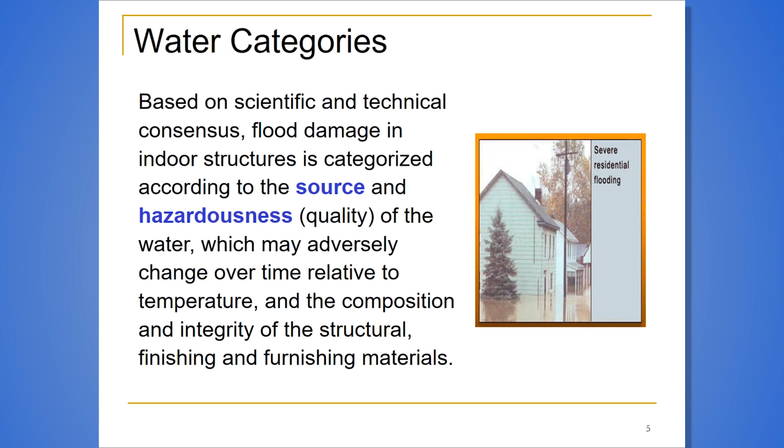It includes. We're now going to address water categories. The categories that I'm going to describe have been accepted by industry, government, non-governmental organizations as the best way to classify or categorize the degree of flood cleanup and remediation that needs to be done to render home environments back to their pre-flood condition. The categories are based on scientific and technical information that's been gathered and focuses on the source of the water and the quality of the water. The quality designates the hazardousness, which may change over time and needs to be addressed in terms of the way the cleanup is conducted and also those who are doing it, the way they need to be protected.

So these water categories are referred to as Category 1, 2, and 3. Category 1, clean water. This is within a home from a clean source, no immediate health concern. For example, a child plugs the drain in a tub, runs the water from the faucet, and then forgets about it, runs outside to play.

The tub overflows, and we have a limited area flood condition in the home. Since it's clean water, it's not intrinsically contaminated. As long as it's addressed quickly, there's little concern.

Obviously, the water needs to be extracted, and examination needs to be done to determine the penetration of the clean water. The water needs to be removed by moving air, dehumidification, and then inspected for several days later to ensure the absence of odors, which would indicate microbial growth.

Category 2 would be gray water. This is more of a concern because this water does have some contamination. Classic examples would be from a dishwasher or a washing machine.

If they leak, they flood an area in the home, and it's similar to Category 1, although now we recognize that water contains microorganisms. Because of that, there is expedience required, perhaps more so than Category 1, to quickly remove the water and dry the affected materials in order to prevent a situation where, if left sitting, it could actually become Category 3.

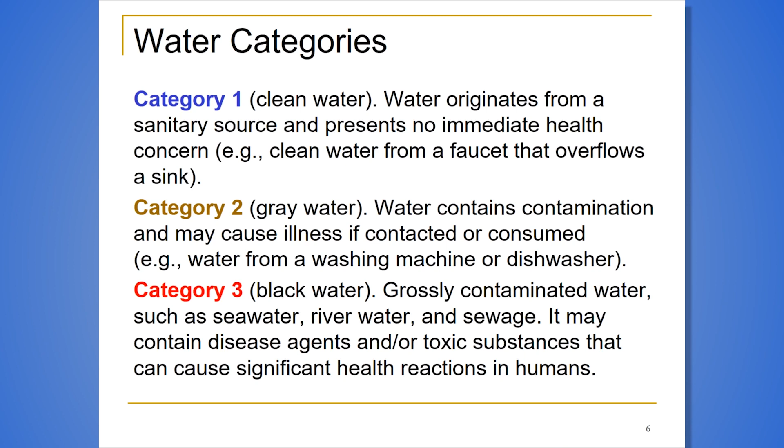Category 3 water contains a variety of potential human disease agents and also toxic substances, residues, and a variety of chemicals that go down a drain that we're all familiar with. Upon human exposure, these chemicals, these microorganisms, and their products or components may have an adverse effect upon human health. The next slide shows more specifically what we're talking about in terms of, first, microbial contamination.

Certainly bacteria - these can be environmental, or they can be of human origin. Viruses would typically be from human secretions, exudates, and waste materials. Fungi, which would be molds and yeasts, and parasites, which would typically occur in a variety of sewage situations.

And these contaminants present both an infectious, an allergic, and sometimes a toxic risk. I'll address that more in a moment.

Chemical contaminants - residues of pesticides, fuels, solvents. Think of floodwaters running over woodland or agricultural farmland, or even a paved parking lot, picking up residues of oil and other solvents, greases, and so forth that have leaked or dripped from cars and trucks. All of this gets taken up by floodwaters and can enter a home or building environment from the soil and soil associated with industrial areas.

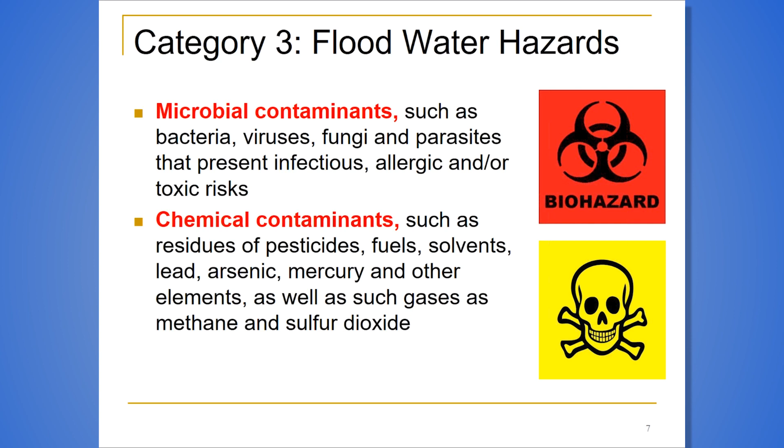It's not untypical to find residues of lead, arsenic, mercury, and then gases such as methane and sulfur dioxide. Those typically will be a result of standing water inside a home environment where they're confined and present an additional hazard to those doing the cleanup.

I'll address the topic briefly of water categories changing over time. So after 24 hours, water categories can change. Category 2 water, if left unremediated, can become Category 3 due to time and increased temperature, where we have essentially incubation conditions for a slew of bacteria and fungi, particularly molds, that can continue to grow and multiply until the water becomes grossly contaminated, which defines Category 3.

Such situations, for example, can actually result from a Category 1 water loss. I remember a situation in a mountainous environment in the U.S. where someone had a mountain cabin that they used periodically during the year, but not very frequently. They would leave the heat on, particularly in the wintertime, to prevent pipes from freezing. Well, they allowed individuals to use that cabin, but those individuals, when they left, turned off the heat. Pipes froze, burst, and it wasn't until two weeks later that someone discovered the water still running, several feet deep.

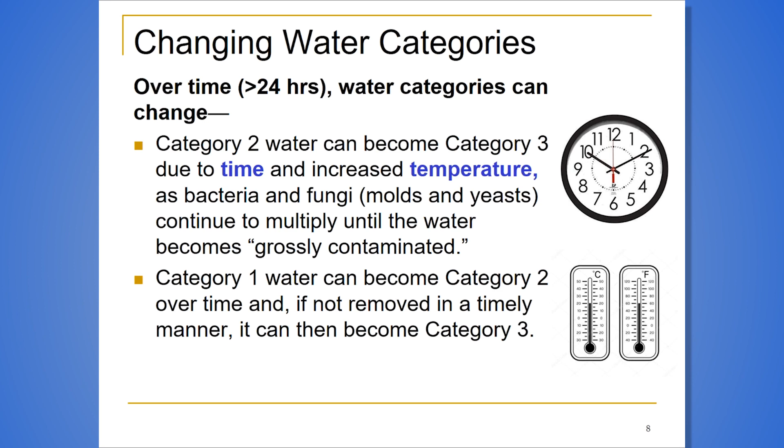We'll focus on one of the most serious consequences of flood-damaged homes and the time factor relative to Category 3 water, and that's mold contamination.

Most of us, I think, are aware that molds typically reproduce by a mechanism utilizing structures that they form called spores. Spores are essentially seed-like structures, just like we plant vegetable or flower seeds in a garden - add water, they germinate and grow. The same situation is in effect for mold spores. These are seeds that can be widely disseminated. They can be produced in heavily contaminated areas by the millions. Wherever they land, if there's enough available moisture, then they can begin to grow.

And then grow quickly if conditions are optimum for their reproduction. We call this amplification. And then, due to air currents, activity in the area, individuals coming in to clean up the flood damage, extract the water, remove the damaged materials, there can be extensive dissemination of these spores.

Mold growth always follows the path of water migration, and many can reproduce on materials, which we'll discuss, porous and semi-porous materials as we call them in particular, that provide a substrate or food source for their continued growth, amplification, and dissemination.

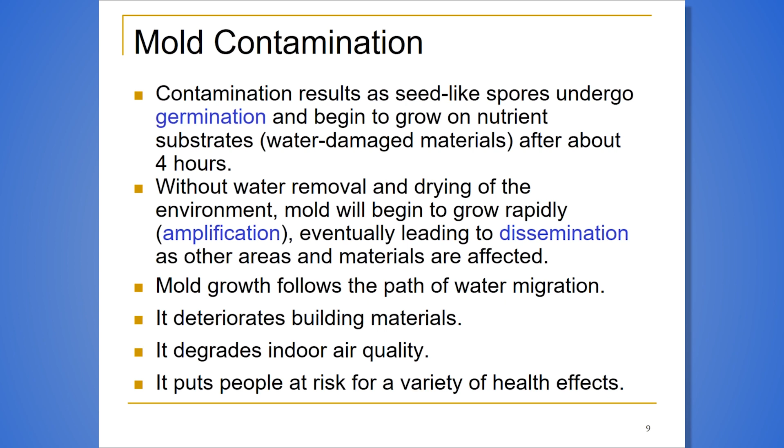Many molds love wallpaper, and in particular, wallpaper glue. Molds, when they attach to a surface and begin to utilize the substrate as a food source, they excrete enzymes that will actually dissolve the material so that the material nutrient sources can be utilized by those molds. And so in that enzymatic process, those materials, those substrates are degraded.

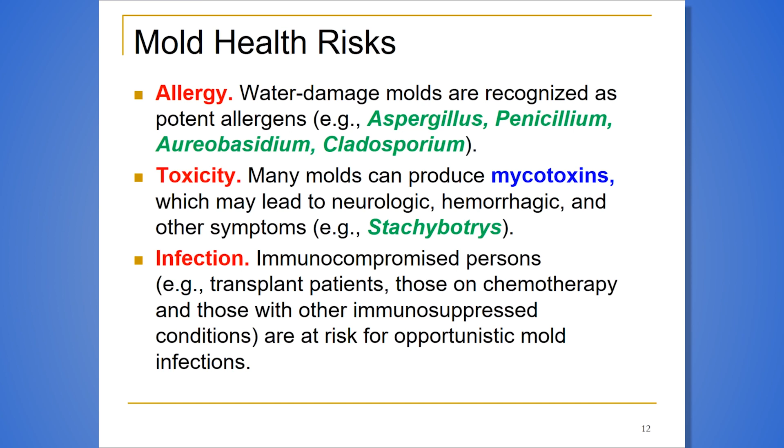We have consensus these days across the board from many organizations and agencies. I'll just share some here with you. U.S. EPA has stated all molds have the potential to cause health effects.

The Institute of Medicine, National Academy of Sciences, in a landmark publication in 2004 entitled Damp Indoor Spaces and Health, stated excessive indoor dampness is a public health problem. The main reason is that dampness can precipitate the growth of both bacteria and mold, which can present risks in regard to allergy, toxicity, and potential infection.

And then ACGIH, the Professional Industrial Hygiene Association that works in occupational environments, states active fungal growth in indoor environments is inappropriate. It leads to exposures and adverse health effects.

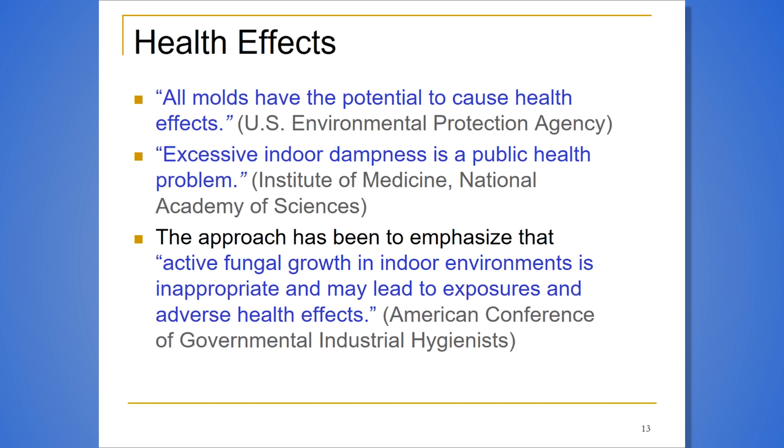The first step, assuming water has drained or been extracted, is to remove the salvable or unsalvable materials - what can be retained and cleaned and put back in the home after everything is completed, or not.

Then we have some structural activity to consider in terms of removing water damaged, mold-contaminated porous materials. We then undergo a cleaning process or muck out. At the same time, begin drying the environment. We'll discuss biocides, which can be used.

But if biocides are to be used, there is much to be known about their use, and we categorize their use as to be done with caution. Drying is essential, and then prior to reoccupying the home environment...

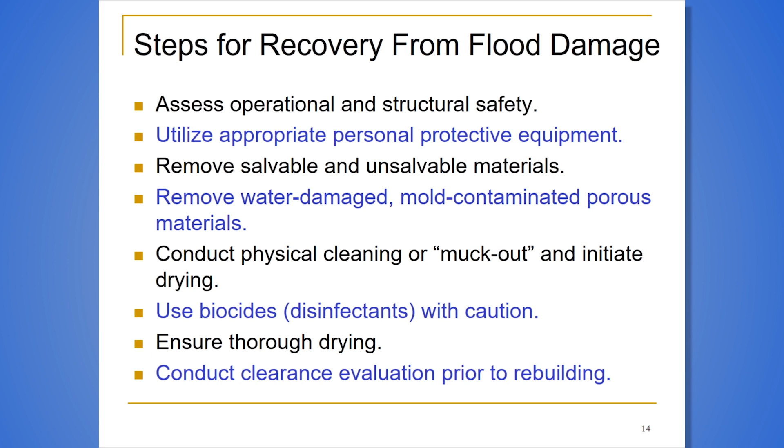So let's go ahead and begin to address these 8 steps, which would be operational and structural safety. As I've stated here, although floodwaters may have receded from the area, standing water may still be in the house.

Unfortunately, we know of a number of situations where individuals wanting to go in and assess damage, even with a few inches of water still remaining in the home, have stepped in, and unfortunately the power had not been turned off, and extensive shock or electrocution may occur. So something simple is ensuring that the power indeed is off, that wires are not in contact with the water. A simple but extremely important safety measure.

And then again, if there has been water still sitting there, even a small amount, animals may have taken shelter. There may be snakes, or in certain areas of the country, there could be an alligator in there - animals that have become trapped and obviously present hazards to those individuals that walk in.

And then certainly the structural integrity of the home itself. How does it look from the exterior? Is there a roof that's drooping? Is there a foundation that's cracked and crumbling? Are there concerns that this structure that is left may collapse? This is an assessment that should be made prior to entering the water-damaged environment.

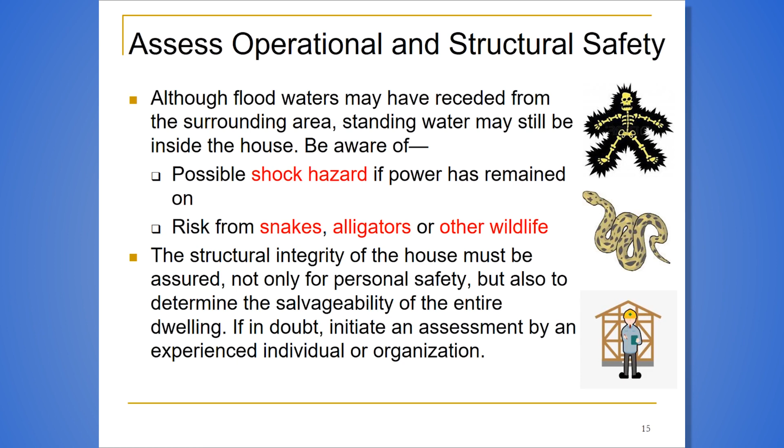Continuing with personal protective equipment, we want individuals to be properly protected. And yes, it's going to be a very warm and very humid environment typically, but we do recommend for this initial walkthrough and then start of the cleanup, individuals wear long pants, long sleeve shirts, proper footwear, preferably boots or work shoes of some type - certainly not bare feet or flip-flops, too many physical hazards - and then exposure to the Category 3 or black water and its contaminants.

Respiratory protection nowadays is available at home improvement stores, even supermarkets. An N95 disposable mask is inexpensive and certainly worth the price. I do recommend those that have an exhaust valve built in to avoid the buildup of humidity in the mask and maintain its useful function over time, so it doesn't become saturated and lose its effectiveness.

The last bullet here on this slide: keep individuals with conditions that make it difficult to breathe away from cleanup activities. So individuals with respiratory allergies, those that have asthma - well, those with asthma certainly couldn't wear a standard respirator and might even have problems with a disposable respirator. Any respirator provides additional stress to the breathing process, makes it harder to breathe. We would urge individuals with those health conditions to refrain from participating in those activities.

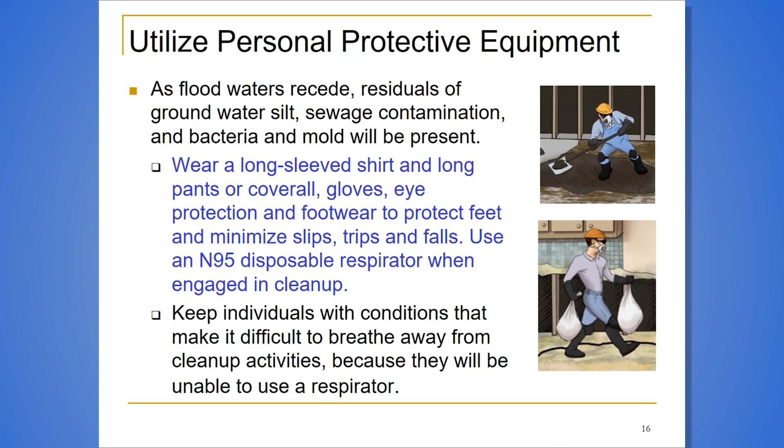So now that we're effectively garbed, our focus is identifying and removing salvable and unsalvable materials. Some furniture, clothing, appliances, and others will be damaged beyond repair.

If there's been a washing machine and the motor has sat in water for two weeks, it's unlikely, due to the insulation materials, the wiring, glues, sealants, and so forth, that it can be restored to its pre-flood condition and remain working.

Furniture comprised of a number of different substrates we've spoken about can be actively growing mold and bacteria, and will not be capable of being restored to pre-flood conditions, and may be very much at risk in terms of human health.

Things that are non-porous and made of metal or glass, and clothing, for example, may typically be able to be laundered and salvaged. It may take several washings. That's a determination that will need to be made.

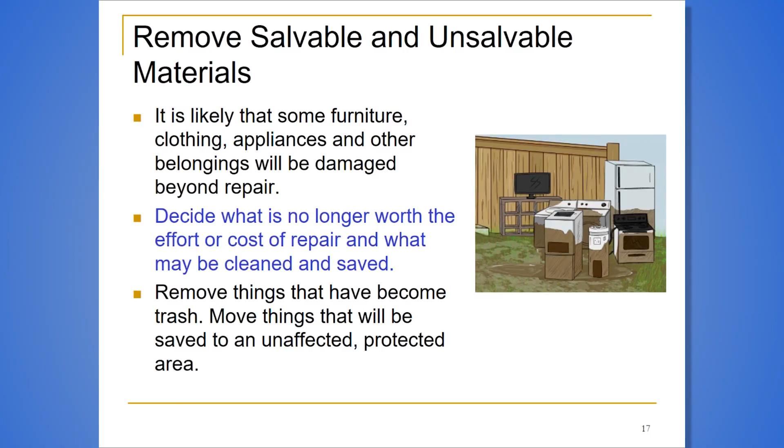As things are brought out of the house, they need to be separated, and those that are salvageable moved to a safe area for subsequent cleaning and reconditioning. So we'll go to a slide that shows someone going through the removal of materials prior to indoor cleaning of the flood-damaged home.

As we go to the next slide, we'll be a little more specific in terms of what might be salvable and non-salvable. Electronic equipment, if it had no contact with water, potentially, even though it's been in a high humidity environment, might be salvable. It might take a specialist who does that type of restorative work. So if there is electronic equipment or appliances that are very high value, if they were not submerged and appear salvable, the recommendation would be to take them to a professional that specializes in restoring electronic equipment and appliances.

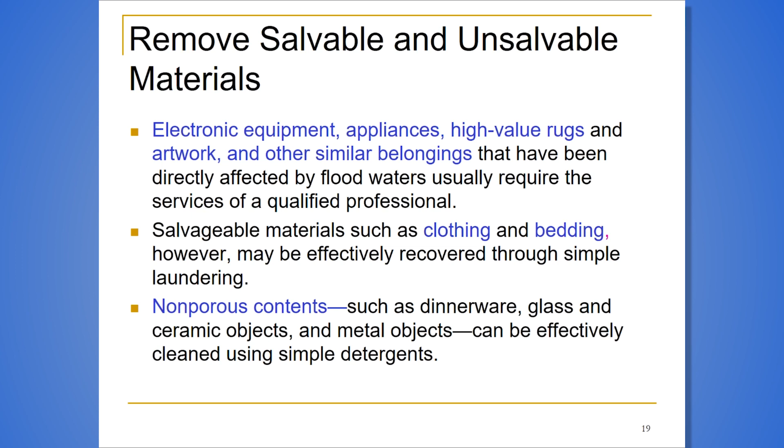It's not unusual for individuals coming back one, two, three weeks later to be greeted with this type of scene in their home environment. This is how rapidly water can wick up materials. It's a high humid environment. All surfaces and materials are now growing mold and associated bacteria, especially those structural materials that are semi-porous, such as fiberboard, OSB, oriented strand board, plywood, even hardwood materials have to be removed. They're not salvageable.

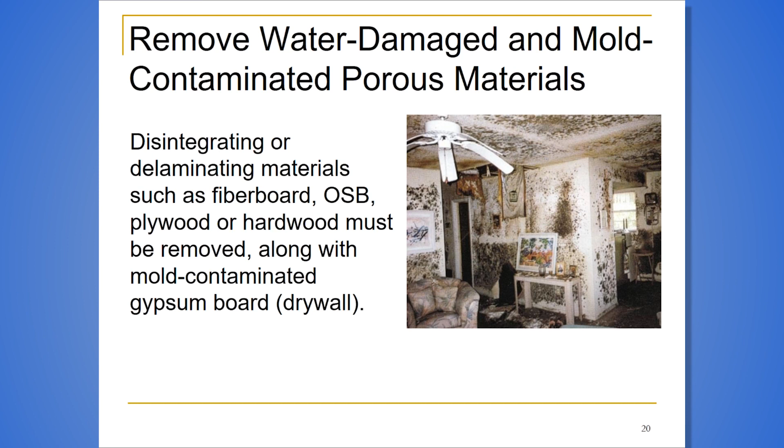And of course, this gives us great cause for concern. In this situation, the homeowner is going to do this themselves. They absolutely have to be properly protected, as we've discussed previously.

We're going to discuss physical cleaning and how important this is. So at this point, we have individuals who are properly garbed and protected, going in after water has been extracted or has drained away, previously to returning, and now physically removing the dirt, the soil, the silt from the river water and the like. Sometimes it requires a wheelbarrow and shovels, other times raking it or sweeping it up.

At this point in time, we want to clean these materials out in bulk as much as possible in order that we can begin the drying process and begin to investigate the penetration of the water into subflooring, behind cabinets, into interior wall spaces, and the like.

Now we are going to get very soon to the importance of drying. Once the waters have receded, excess moisture has been extracted, the cleaning or muck out has been done, the power is back on in the home, it's very easy for a homeowner to say, well, let's flip on the air conditioning system and help dry out this environment. And of course, air conditioning systems work on a dehumidification process and can be extremely helpful.

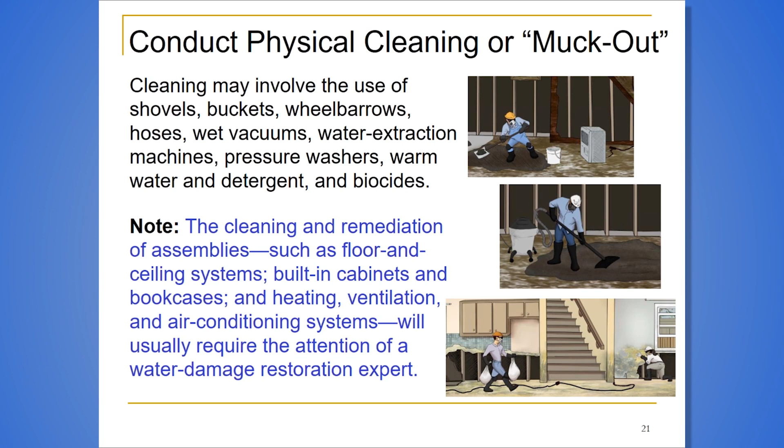We see some individuals doing the muck out - top left individual, again, very common. It's a hot, humid weather condition. Fortunately, this individual appears to be wearing proper footwear, but has skin exposed, no respiratory protection. In the bottom photo, at least they appear to be wearing Tyvek suits, safety shoes, and are now using water and detergent to do the cleaning, or as you see here, getting the muck out.

We'll focus now on cleaning, and this is the removal of any standing water, debris, trash. We've gotten the salvageable items out, and we're looking at using detergents - yes, detergents in water. Our first reaction might be, wait a minute, we're going to put more water back in? Well, water is going to be the best means of using a detergent to help clean, just as we normally clean a variety of surfaces and materials in our home. There's not water damage, yet we have to remove that water when we're done and initiate drying. So yes, most cleaning will involve an aqueous solution of water and detergents.

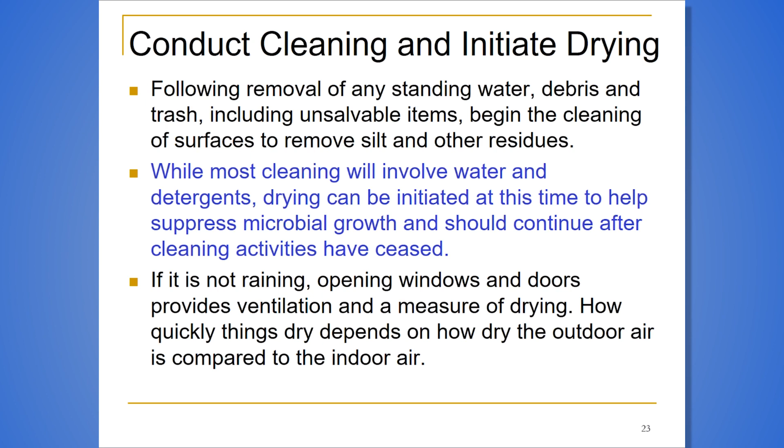If it's not raining and someone's living in a dry environment, they can open windows and doors, get ventilation, and begin drying things out. Drying depends upon how dry the outdoor air is compared to the indoor air. It's not unusual for flood damage situations to occur in very humid environments, and so we don't want to open doors and windows. We want to dry out that indoor environment, so we close doors and windows. We've removed salvable materials, we're initiating drying, we've cleaned everything out, and we want to dehumidify the air.

Drying is typically facilitated by moving air across a wet or damp surface. We do this when we use a hairdryer, for example. How does a hairdryer work? It blows warm, dry air through our hair, strips off the water molecules, and sends those into the air. Typically, an indoor home environment is at a low humidity, might be in the 40s or even high 30s, and the moisture will stay there in the air. However, in a high humidity environment, whatever water molecules move off a damp surface, if it's very high moisture content in the air, which we call relative humidity, then those water molecules will tend to recondense on surfaces. So it's self-defeating unless we can get that water out of the air, and so dehumidification is extremely essential.

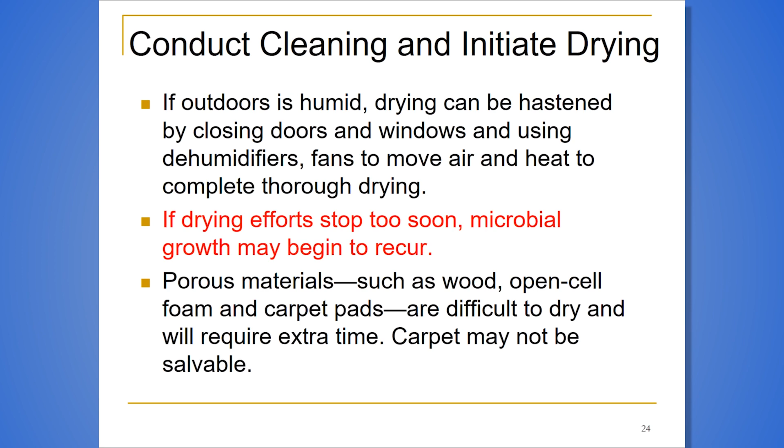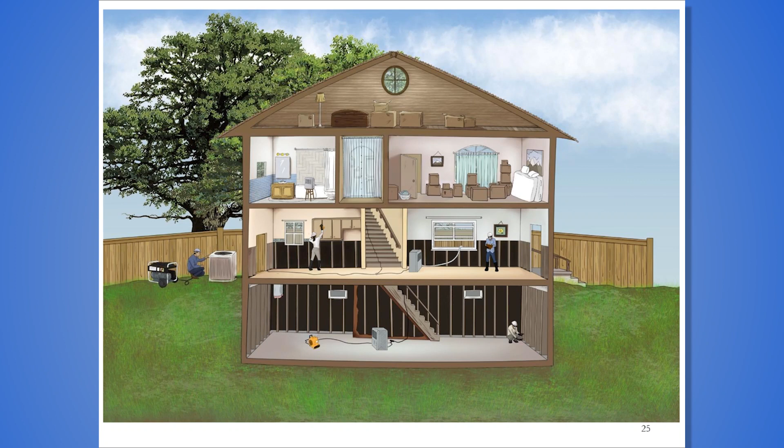This is a Category 3 flood damage situation. We have a pictorial which will appear in the report made available to the public, which is webinar based, to show activity. The salvable and unsalvable materials have been removed below ground in the basement area. The drying and dehumidification is ongoing while an individual is assessing the wood framing and whether it needs to be replaced or not. The drywall and insulation material have all been removed. On the ground level, we have ongoing cleaning, as well as drying and dehumidification. On the upper level, in the right room, materials were placed there that, as the flood began to occur, were not water damaged and were preserved from exposure. On the left, we see a bathroom environment that, usually high humidity anyway, is being dried down, and microbial contamination is being remediated. We see a containment curtain there between the two rooms.

When large open surfaces are dry to the touch, water can still remain in cavities, cracks, and non-contaminated porous materials that are still intact. They may be dryable. Some cavities can be opened and aired out. Others can be accessed only by removing built-in cabinets, making holes in kick spaces, soffits, or wall or ceiling cavities, which may require the use of a professional. Again, an emphasis at this point in time on moving air, increasing dehumidification, and those cavities and structural spaces will take some time to dry - usually several days, usually at least 72 hours or more.

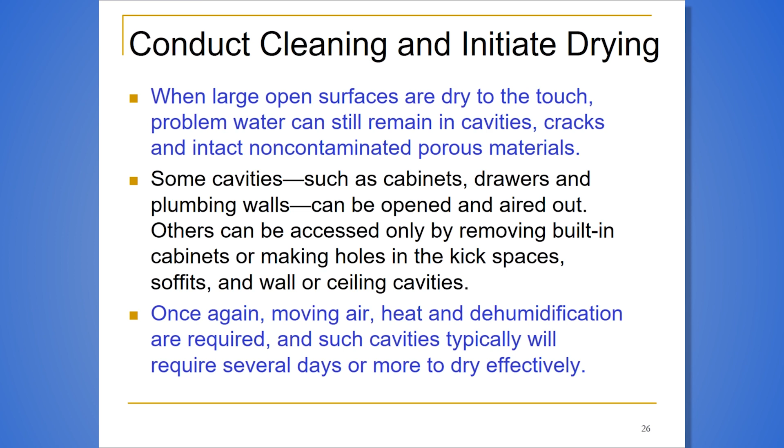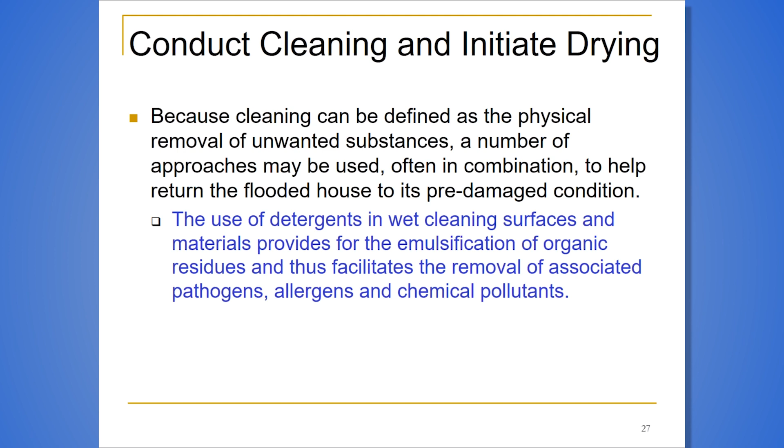We begin to address the topic of biocides. Biocides are chemical formulations - by nature, bio means living, and cides means kill. So we're looking to kill life forms, typically bacteria, fungi, viruses, parasites. These will have a statement on their label that they are a disinfectant, a sanitizer, or antimicrobial. By law, if that appears, then they are required to be approved by the U.S. EPA as part of their antimicrobial pesticide regulatory requirement.

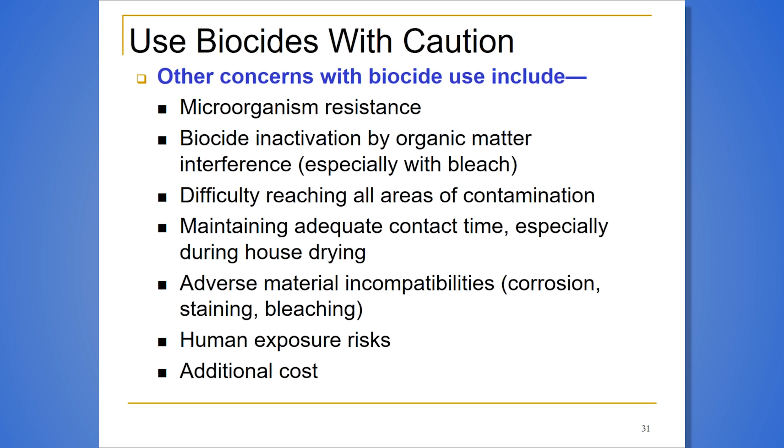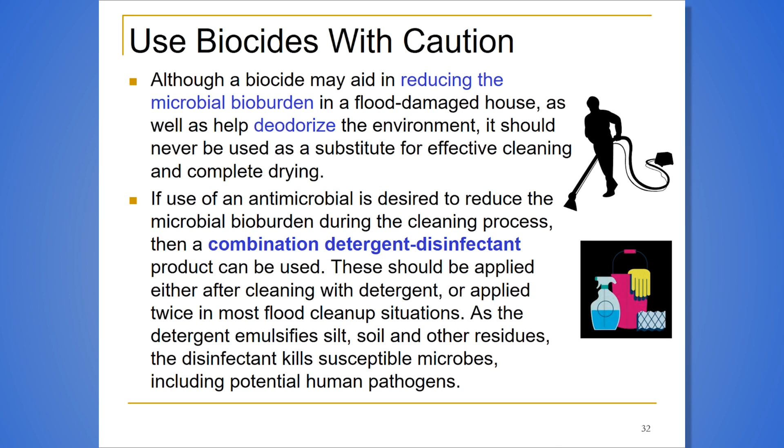Bleach is no longer recommended, and I typically explain why. It's a caustic chemical, it's corrosive, it bleaches. We don't want individuals having skin exposure, having it splashed in their eyes, or using an improper dilution. It's neutralized by organic matter. And then there's always folks who say, gosh, I want to make my own super cleaning solution, and they'll mix it with another commercial cleaner containing ammonia, which will liberate chlorine gas. Every year there are a few cases of individuals who succumb fatally to this exposure.

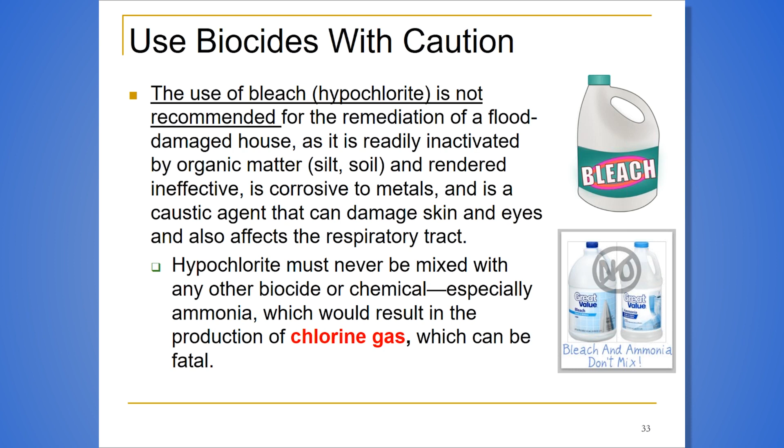Just want to point out briefly, gas phase biocides are not recommended, and I'll put the emphasis particularly on ozone. So if you're doing your own flood damage cleanup and restoration, and someone comes through the neighborhood and says, hey, I've got an ozone machine that can take care of all of this for you and decontaminate your home, my advice is tell them to move along.

It's not going to work. Ozonators will generate ozone, but at the concentration needed, it can be damaging to materials and electrical wiring. It's an extreme hazard to the human respiratory system. And it can't be delivered, like biocides in general, into every nook and cranny at a concentration maintained long enough to inactivate microbes.

Although ozone can occur naturally in the summertime as it interacts with pollutants in inner city environments, or occurs sometimes after a thunderstorm and lightning, and it is, quote, natural, it shouldn't be used in the home environment. The emphasis on drying again—start drying at the beginning of the cleanup.

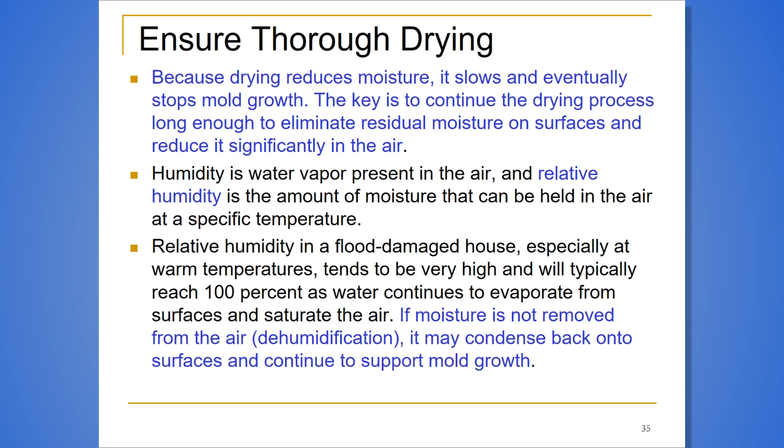It would be useful to monitor relative humidity. That can be done with simple instruments that can be purchased in a hardware store or home improvement store. But the key to keeping contamination down is rapid and effective drying.

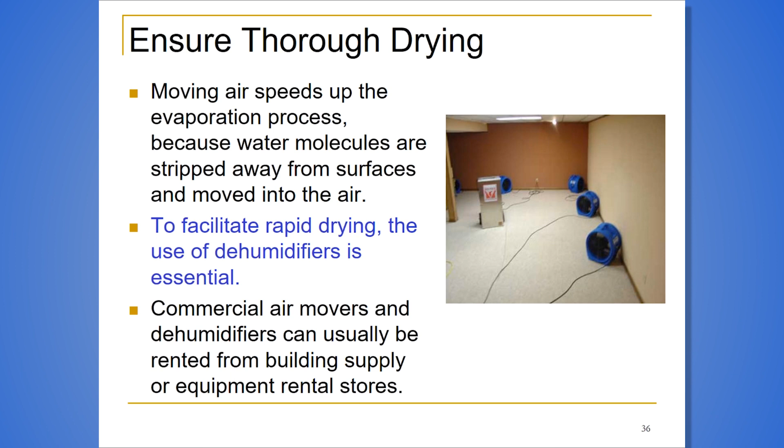We can see this being done in a home environment. Commercial air movers and a dehumidifier can be rented or borrowed if they happen to be in your neighborhood. Again, monitoring indoor temperature and relative humidity is essential and can easily be done. We certainly in the home environment want to, as quickly as possible, get relative humidity below 60% and then continue to decrease that over time.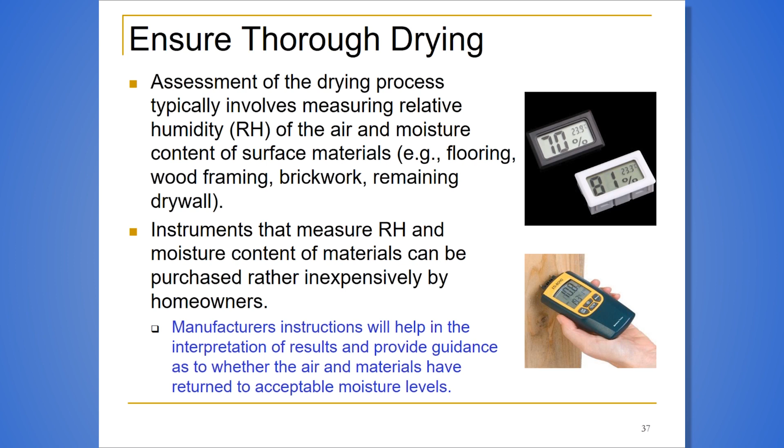Hopefully by this point, the air handling system has been assessed, cleaned, and put back into service, which will also help to speed the dehumidification process.

In terms of clearance, how do we know when we're ready to rebuild—start putting up walls and ceilings, repainting, and making the home habitable again? Well, in terms of the homeowner without professional help, it's doing this initial assessment.

Three questions. Is it dry? Does everything look and feel dry in the home at that point? Second, is it clean? Does it look clean? Is there an absence of mold contamination and dust on surfaces? And lastly, is there an odor? If there is still a musty, moldy, or mildew-like odor, that's typically a sign there's still a pocket or pockets of moisture and microbial growth somewhere.

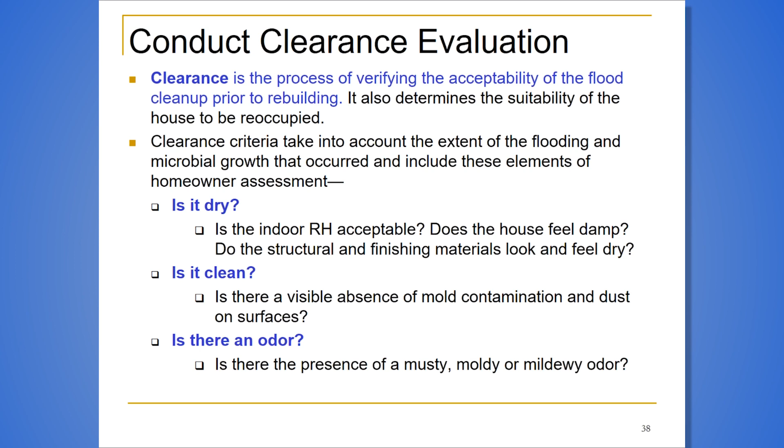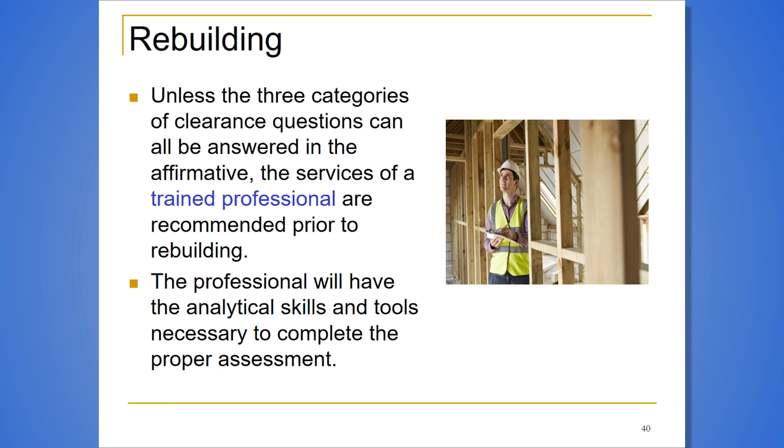If individual homeowners can't answer those three questions reliably in a condition like you see here—this is when to do the clearance evaluation—they may need the assistance of a professional. Why spend hundreds and thousands of dollars bringing in drywall, ceiling materials, and other structural and furnishing materials if we're not absolutely sure that all moisture and contamination has been removed?

The rebuilding has been done, and we are moving the family back in. How do we know that everything is clean and exposures will not occur? Well, it's just going to take time, and we'll have to see if there are any adverse health effects that occur. So in the long term, the ultimate criterion for successfully reoccupying the home is the ability of occupants to live there without health effects—without allergic type responses, and if there's an asthmatic child, without increased triggering of asthmatic effects and that type of thing.

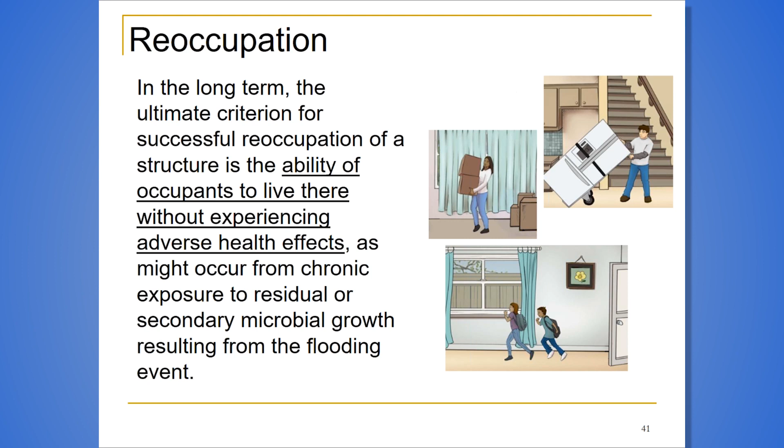And with that, I will end my presentation. I hope it's been of value to you, and we'll welcome some comments and questions.